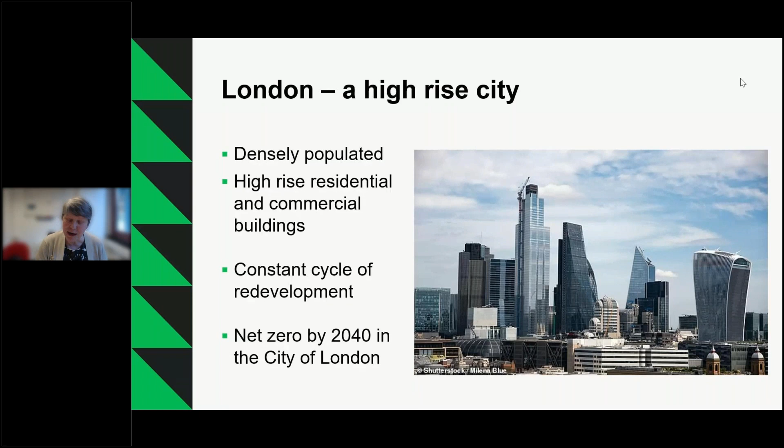And if we want to achieve net zero by 2040, which I think is the aim of the City of London, we need to reuse as much as possible of the buildings we redevelop, including their foundations. So what are these foundations?

High-rise buildings in London are supported largely on deep pile foundations, which are constructed in the strata underlying London, as shown in this simple geological section of the London Basin. London clay is the major strata beneath London, underlain by a mixture of clay, silt and sand, and then the chalk. The depths of these strata vary quite dramatically across London, so that whilst it would be convenient to just construct foundations in the London clay, many will go down into underlying strata, even as far as the chalk.

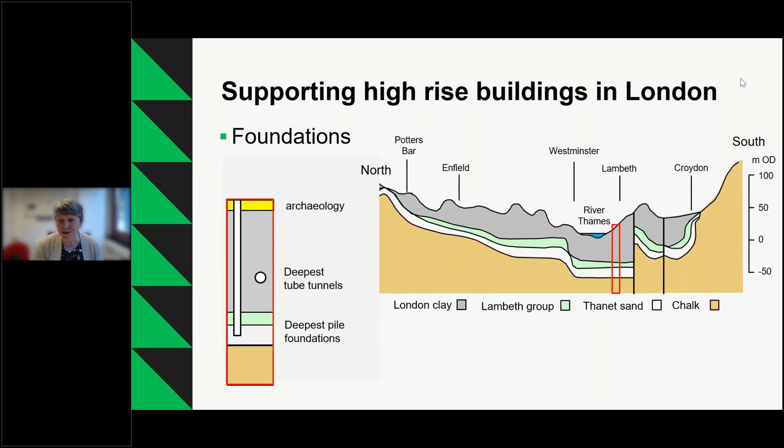So what is a traditional pile foundation which we use to support these buildings? Well, these sit in the London clay and are generally cast in situ piles. For these type of piles, you excavate a bore, a circular hole in the ground, you suspend some steel reinforcement in that bore, and then you fill the bore with concrete. You then have a pile which will take some of the load of the high-rise building that you construct above it.

The majority of that load that acts on the pile is taken in shaft friction. And if you want to take more load, you have to either increase the diameter of the pile or make it longer. You can put pipes in these piles before you put the concrete in, at around this stage, and then circulate water through them, and that will give you a thermal pile for heating and cooling your building. That type of thermal pile is quite common in mainland Europe, not quite so common in the UK.

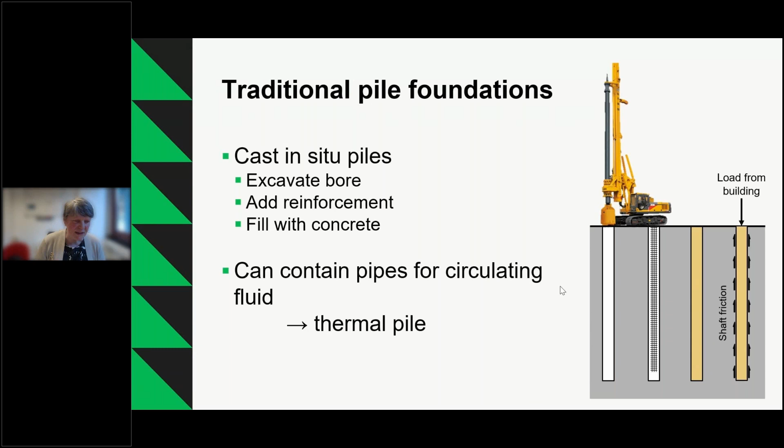So why is this approach not really sustainable? Well, to start off with, there's a lack of space beneath the buildings because of the foundations from previous buildings. And if we keep putting more and more foundations in, we're just going to fill up the ground with concrete, which is not really what we want.

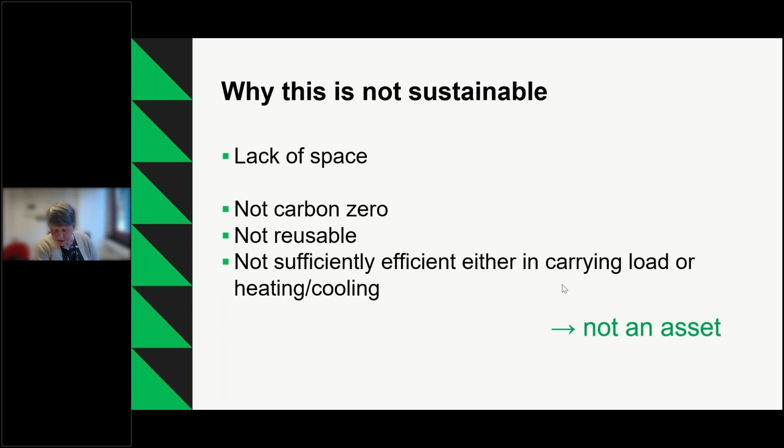We cannot achieve carbon zero, because we're using carbon in order to create our foundations. And even if we use the piles for heating and cooling, we're not offsetting that carbon significantly in a conventional pile, because that process isn't very efficient. And we're not reusing our foundations, so the new piles installed are often not sufficiently efficient in the way they carry the load. So while we're constructing foundations that hold up the building, they're not a long-term asset for the building.

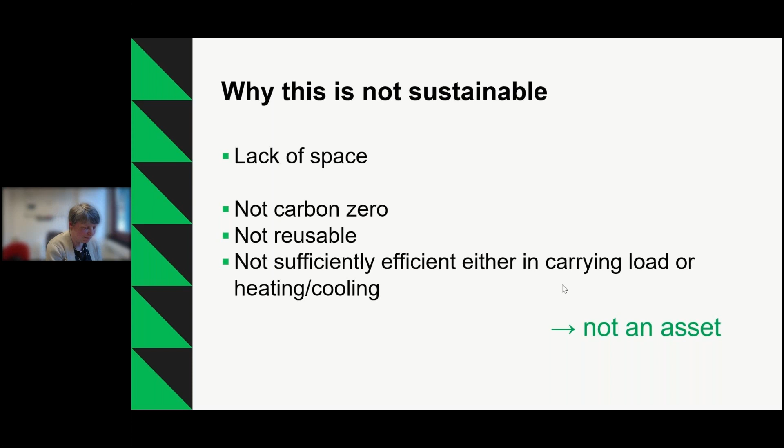So let's think a little bit about the lack of space. This is well illustrated when you look at these two buildings here. This is Bucklersbury House, constructed in 1959, early 1960s. And this is the Bloomberg building, constructed probably mid to late 2010s. You can see they're roughly the same height of building, one's not much larger than the other, but the foundation solutions are quite different.

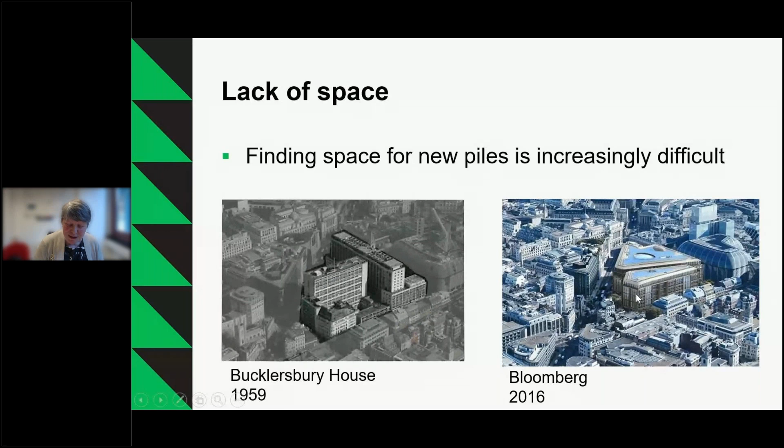In the 1960s, the method of creating pile foundations was something called tripod piling, which meant you put in loads of small diameter shallow piles, visible on the left-hand side. This tripod piling was going on in the 1960s. In contrast, the Bloomberg building was built on a much smaller number of large diameter piles, which is much more fashionable now, and those large diameter piles clashed with and had to be fitted around this forest of smaller piles.

You can see this forest of smaller piles when you look on the right-hand side of the picture, and you can see archaeologists sifting through the Roman remains which exist on this site. It really is a forest of piles, and it becomes apparent how easy you can fill up the ground with concrete if you're just putting more and more foundations into the ground.

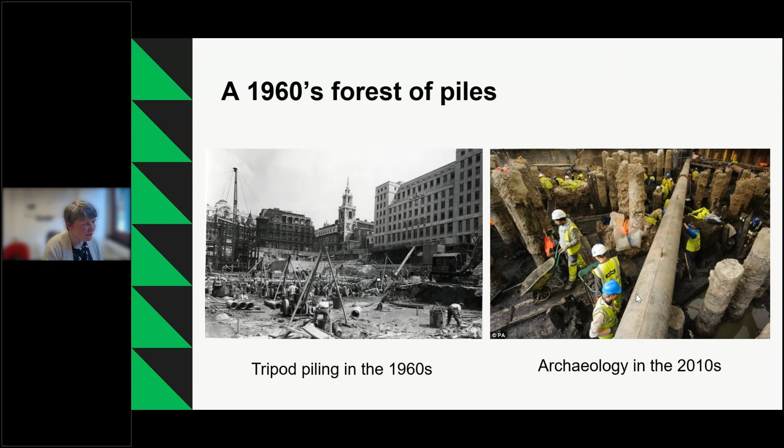So if you want to avoid that and try to achieve net zero carbon foundations, we need to try and minimize the concrete we're using. This is because the majority of concrete is made with cement, and the global cement industry currently creates around 8% of global CO2 emissions. So if the cement industry was a country, it would be about a third in order of magnitude of global emissions. That's really quite significant. So minimizing concrete is absolutely crucial.

We also want to minimize plant and supply movements, which is linked to the amount of concrete we use, because quite a lot of the plant and supply movements are to do with moving concrete around, although some of the plant is to do with excavating holes on a site. And then using the piles for heating and cooling the building will allow us to offset our carbon emissions. If we can do that efficiently, we should be able to move to carbon net zero foundations.

So let's just think about the ultimate aim. If we can reuse our foundations, then we don't have to build new foundations, and we don't have to worry so much about the concrete we're using, etc. And that was something that we've really thought about a lot at City.

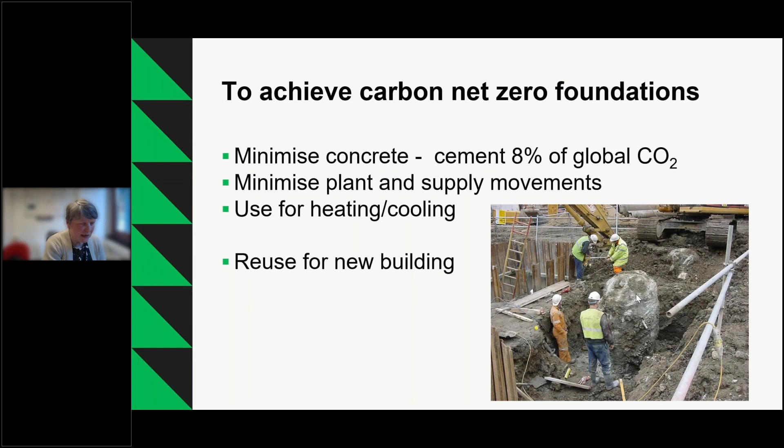The innovative foundation that we've supported Keltbray Piling to develop is called the HIPER Pile, and this is what I'm going to talk about today. HIPER stands for Hollow, Impression, Precast, Energy and Reusable. I'm going to focus on why the pile is hollow, what the impressions add, the energy element and why the pile is reusable, but I'm not going to cover the precast aspect. This is a particularly clever bit of manufacturing that Keltbray have put together, and not my focus for today.

So let's start with the problem of reusing the foundations. This has been an aim of the industry since the middle 2000s. Around that time at City, we had the idea that the way through this problem was to make the pile hollow, and we applied for a patent for this innovation, which was awarded in 2012, and we demonstrated that you could manufacture a hollow pile in 2008.

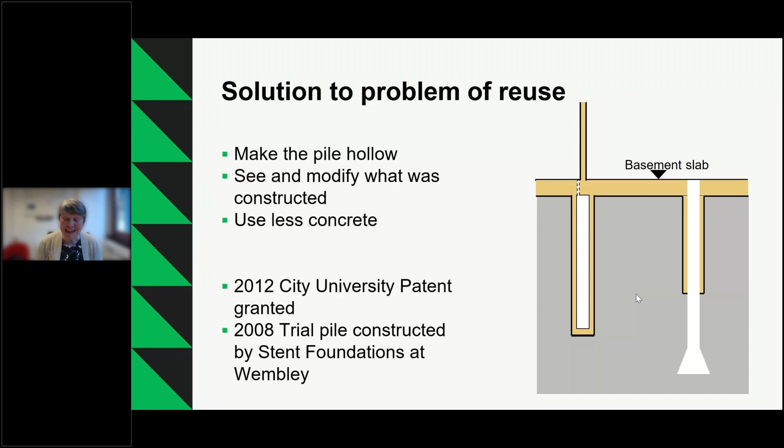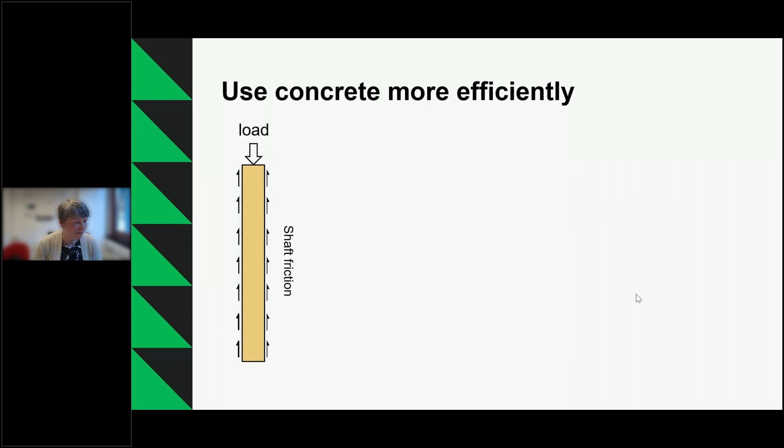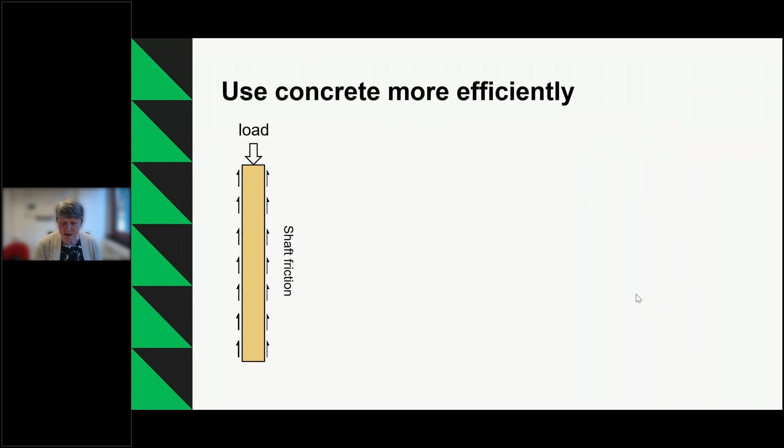So this was one of the drivers behind the City innovation of having a hollow pile. And there was another one, which is that it enables you to use the concrete in the pile much more efficiently. So this is our standard pile, and we've already established that this kind of pile uses shaft friction at the perimeter of the pile to support the load imposed by the building above. So it's primarily how these piles work. So the concrete in the middle of the pile is not really doing anything. Only a fraction of the concrete present is actually required to transfer the load from the building into that shaft of the pile, and you can keep the thickness of that pile annulus to around about 200 millimeters.

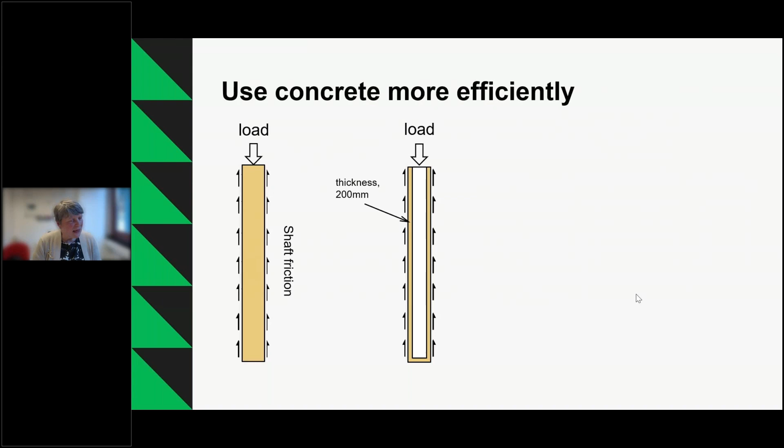So increasing the pile diameter, as it happens, is a particularly advantageous way of increasing your pile capacity if you've got a hollow pile, because particularly if you're constructing piles in London clay, it can mean you don't have to move the pile into the ground beneath the London clay, and that means it's much more straightforward to construct. It also means that you can use one pile rather than a number of piles in a group.

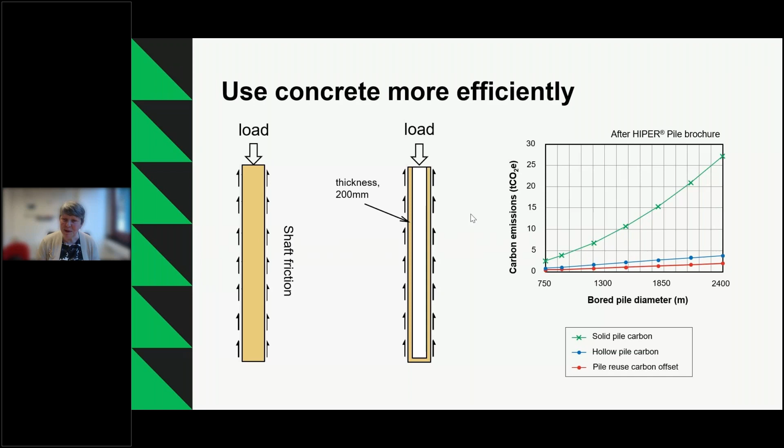So if you've got a large load and a single pile won't work, quite often people would put in a group of piles instead. The problem with a group of piles is that when they're closely spaced, their load carrying capacity reduces due to interactions between the piles. So it's not efficient. The most efficient way in terms of concrete use is just making your pile a bit wider.

So using concrete more efficiently by making the pile hollow is obviously a big step forward. But Keltbray wanted to do more than that, and they've developed a tool that can profile the shaft of the pile. The shaft is where we're getting our load-bearing capacity, and the pile shaft is profiled before the concrete is added. Essentially, this is an impression tool, and that creates impressions or nodules down the shaft of the finished concrete pile, and that increases the pile capacity without having to increase the pile diameter. So it's a more efficient way of giving yourself more pile capacity - effectively a larger diameter pile.

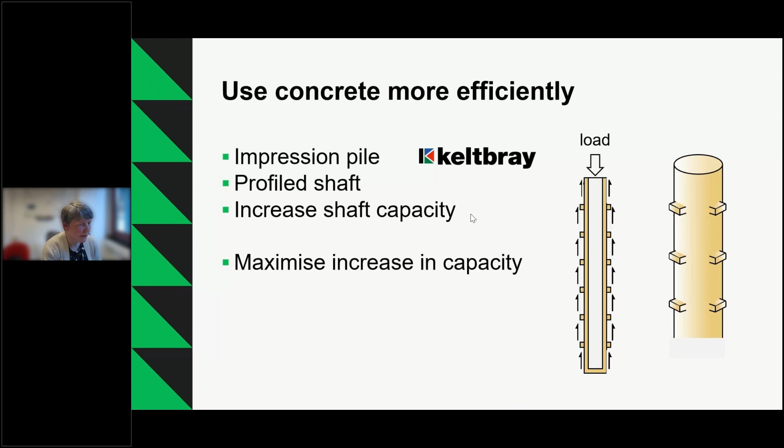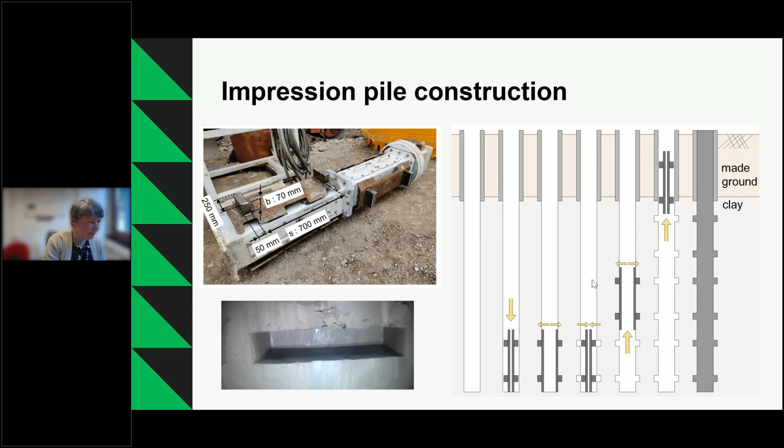So we at City have been working with Keltbray Piling and other industry collaborators on research and development work funded by the government through Innovate UK, primarily to investigate and optimise the increase in load capacity provided by an impression pile. We're using our geotechnical centrifuge, an increasingly common piece of geotechnical testing apparatus that allows you to test small-scale models at increased G levels to ensure self-weight stresses are equivalent to the full-scale prototype.

We generally test at 50 G. The apparatus can go up to 200.

The centrifuge is an ideal method of investigating geotechnical structures where there is an interface between the soil and the structure, and that is the critical element. This is very difficult to model accurately using numerical methods. In these tests we were investigating how the soil deformed around the impressions at the perimeter of the pile. So centrifuge testing was a suitable approach, providing good control of the geometry and the soil and allowing a number of tests to be completed relatively quickly.

So for this project, which ran over 2 years, we ran 15 successful tests on more than 50 piles.

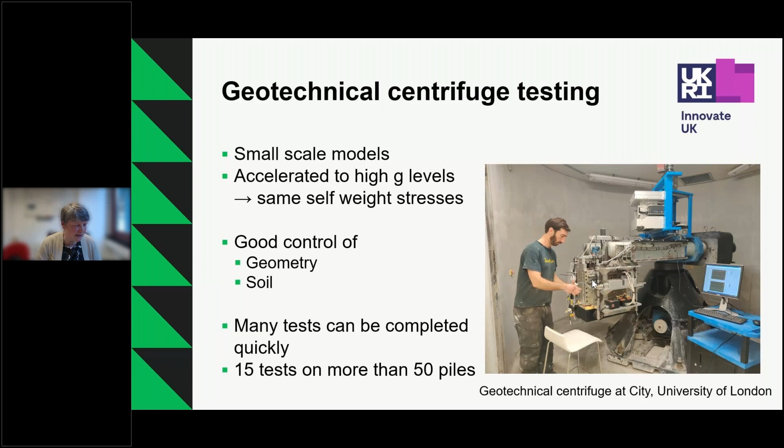So what were some key outcomes of these tests? Initially we were looking at the behaviour of the pile as it failed. What happens is described in the graph on the right. You gradually press the pile into the ground and measure the load on the pile as it settles, and find that at a certain settlement, the load is constant however far you push in the pile. That's when the pile has failed, indicating its ultimate load carrying capacity.

Typical results for the impression piles, the line in red, compared to the straight-sided piles, the line in black, show that if the position of the impressions was optimized, there would be an increase in capacity of around 40%.

We found that the reason this works is because of a block failure where the soil becomes trapped between the little impressions. So if I go over here, these are the impressions sticking out of the pile, and this is the soil which is essentially trapped between those impressions. So you get this block failure along the length of the pile.

This means that instead of just having soil-pile friction along the shaft, there is soil-soil friction along these bands of soil which link the impressions. Soil friction gives you the full strength of the soil, whereas soil-pile friction, for London clay particularly, generates about half the strength of the soil. So not only are you increasing the area of the perimeter generating this friction, but you're also increasing it by having soil-soil friction, which gives additional strength.

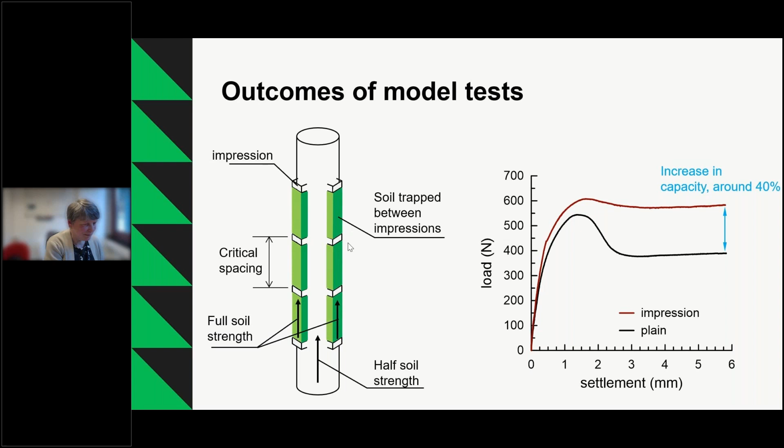In the first series of tests, we were looking primarily at overall capacity of the pile at large settlements, but during testing we gradually increased the sophistication of the model pile we were using, culminating in the pile on the right, which was made of a number of different components that all slotted together to create a much more realistic representation of the model pile and the contact between the pile and the soil. This enabled us to compare plain and impression piles from very small settlements all the way to failure.

The graph plotted here is a little bit more complicated. This is essentially showing the load ratio - the ratio between the load that could be taken by the impression pile and the load taken by the plain pile - as you loaded the pile from very small settlements over here to much larger settlements over here. We normalized the settlements by dividing by the pile diameter, but that doesn't really matter. You're just going from small settlements to larger settlements on a logarithmic scale, which emphasizes the behavior at these small settlements.

It's the behavior at the small settlements that you're really interested in, because they represent the working behavior of the pile. So this green line represents the working loads, or the settlements at which you would be at working loads for your pile. And this line over here is where you would reach failure.

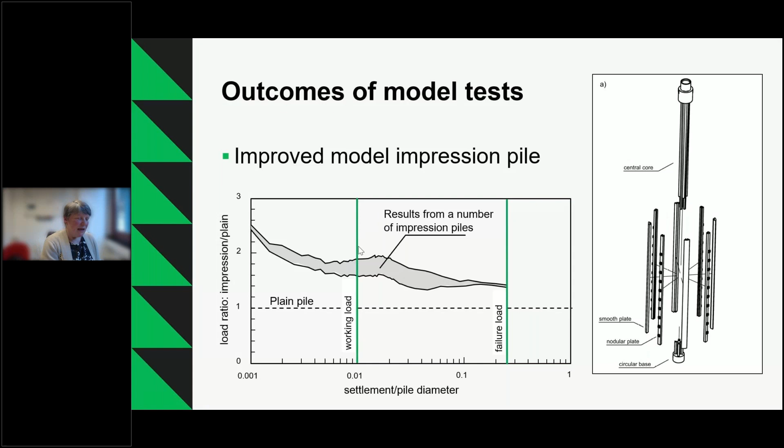The other thing we're looking at with the HIPER pile is using the void for heating and cooling the building it's supporting. Below a certain distance, the ground temperature is quite stable, and so the water can be heated in the winter or cooled in the summer by passing it through a pile. To do this with the hollow pile, you fill the pile with water and then put pipes into the pile.

If it's cold, you'll pass cold water into the pile and you'll get warm water out through a heat exchanger, which is sitting at the top in your building. That will enable you to heat the building.

The combination of water and a narrow concrete annulus gives you a much more conductive thermal pile than you would have with a solid concrete pile, increasing the efficiency of the heating and, in the summer, cooling offered by the pile. It's also much easier to access these pipes and replace them if necessary. As I've said before, once you've opted for hollow piles, these can be of large diameter and not in groups, ensuring optimal efficiency in terms of both concrete and the heating and cooling process.

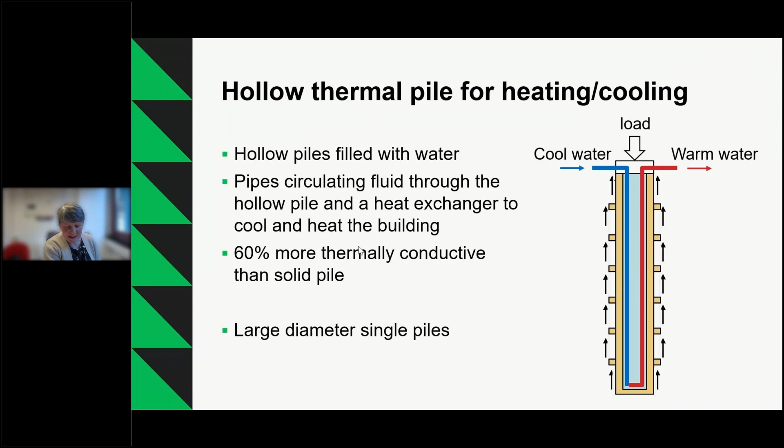We're currently undertaking more model tests on our geotechnical centrifuge to investigate the thermal response of the ground when the pile is heated and cooled due to seasonal heating and cooling of the building. These tests are linked to full-scale hollow piles with heating and cooling constructed for HS2. The beauty of centrifuge testing is that because the models are small, temperature and pore water driven changes occur over small distances and quicker, such that a change in temperature which in a large scale prototype would take a year can be modelled in a few hours on the centrifuge. We can study many years of seasonal temperature changes in a way that wouldn't be practical in the field, and we're collaborating with the University of Leeds and Imperial College London to improve analytical and computational methods used to predict how these thermal piles will behave.

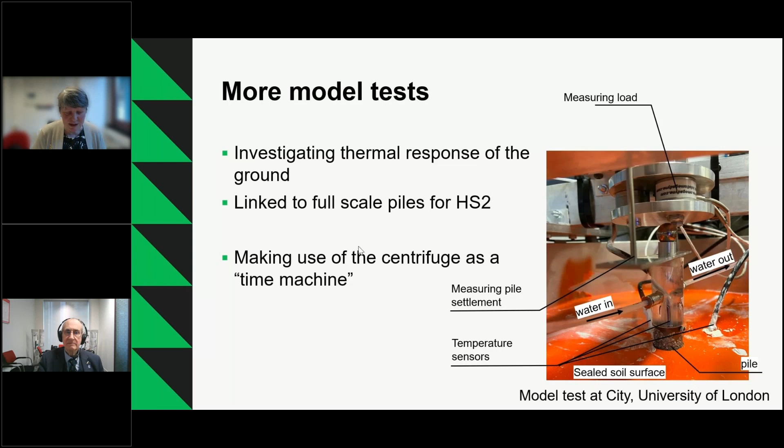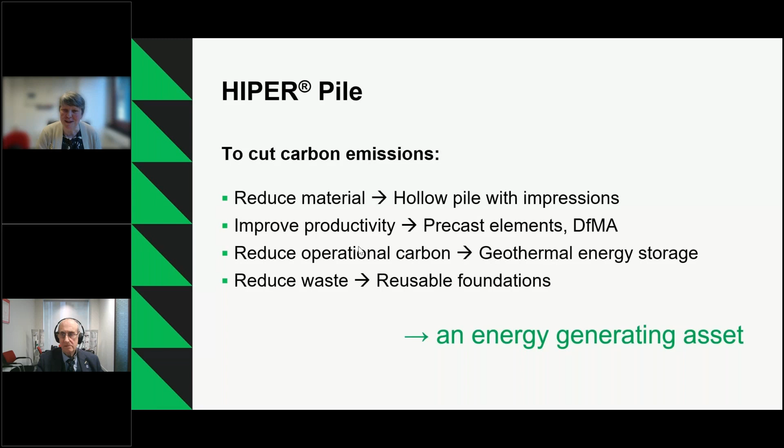So I've told you about the development of our innovative foundation, the HIPER Hollow Impression Precast and Energy and Reusable Pile. I hope you can see that using this type of pile, which is hollow with impressions that reduce the concrete used, thus reducing emissions, we can improve the productivity of using precast elements, reduce operational carbon using geothermal energy storage, getting us towards carbon zero, and that we can reuse, reducing the concrete we just leave in the ground, creating an energy generating asset which we hope is the future of pile foundations. Thank you very much.

Thank you very much indeed, Sarah. Some very interesting stuff there going on underneath our feet.

You said City was awarded a patent in 2012, and as an emeritus professor of the university myself, I'm delighted to hear that. You also mentioned building practice across Europe.

Is this process being used elsewhere? Can you tell me?

So our partners in this piling are looking to use the process outside the UK, yes, definitely. I can't talk in detail, we're at relatively early stages, but yes, it's likely to be used on some very large projects overseas.

Well, I have a background of working with Mexico in particular, and of course earthquakes are a key issue there. I have to say in the dreadful earthquake of 1985, buildings dating back to the Aztecs didn't move. Spanish colonial churches didn't even lose their glass, and half the buildings constructed in the 1950s fell down.

So obviously foundations are a critical topic. Now we've got lots of questions coming in. A good one from James Fleck: how does a forest of piles interact with all the tunnels and services which are underneath London?

So that's a problem actually. The ground underneath London is quite crowded. If you have piles in close proximity to tunnels, then they're not going to develop the shaft capacity that you want. So in some circumstances you do end up extending them lower. Where you have projects like Crossrail, they will preserve the corridor well before the project takes place, so people can't put foundations which will interact with their projected train or tube lines, etc. So it's a complex problem, and they obviously do have consequences on each other.